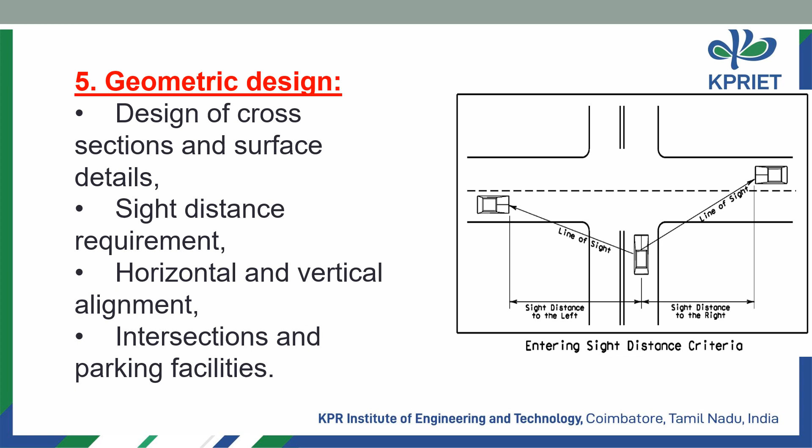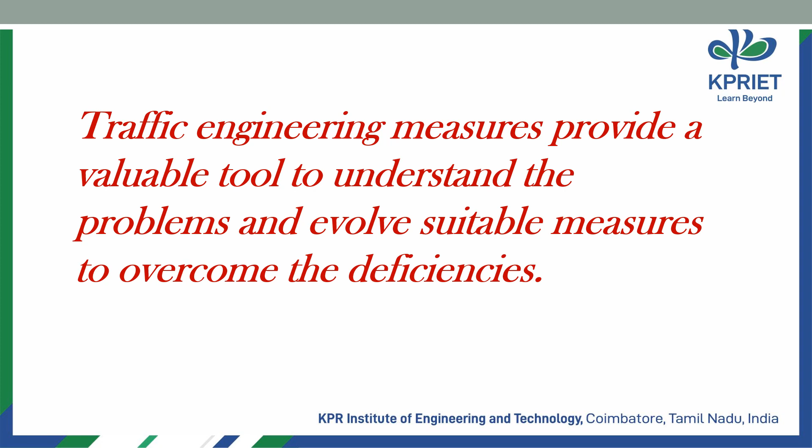Morning. Today we are going to discuss the characteristics of traffic engineering.

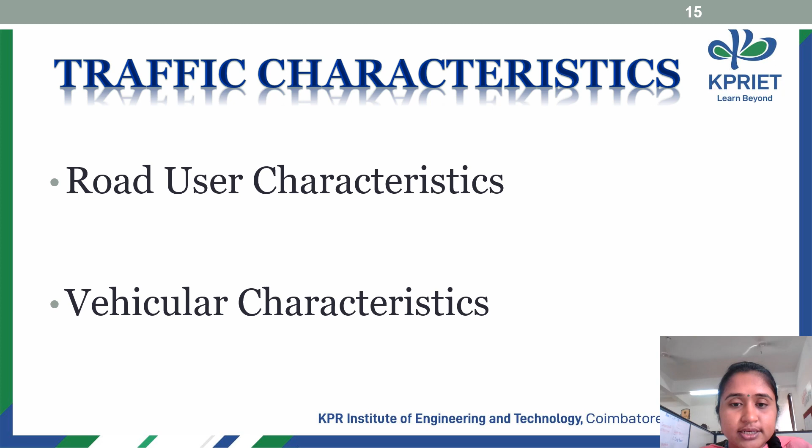Traffic characteristics are generally classified into two categories: road user characteristics and vehicular characteristics. Road user characteristics are based on road users like pedestrians, cyclists and motorists, and are further classified into psychological and physiological characteristics. These two are based on aspects of human behavior on roads, that is, how the human will behave, and based on that behavior these two characteristics are provided.

The first one is physiological characteristic. These are measurable and quantifiable, but psychological characteristics are not quantifiable and are more difficult to measure. The physiological characteristic may include vision and hearing, and the psychological characteristic may include perception, intellection, emotion, and volition.

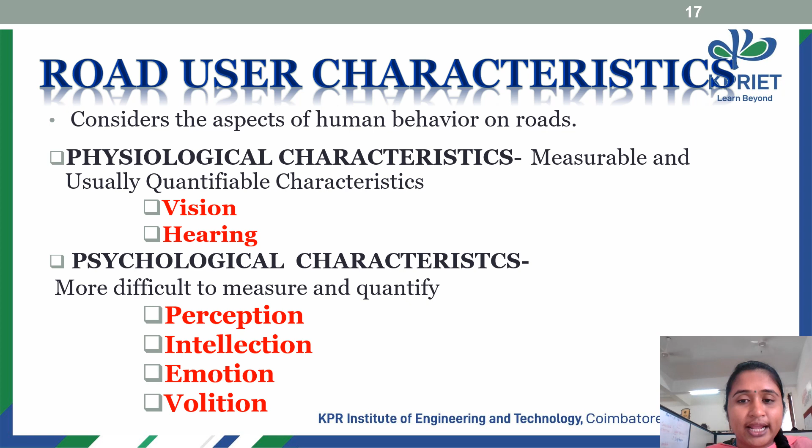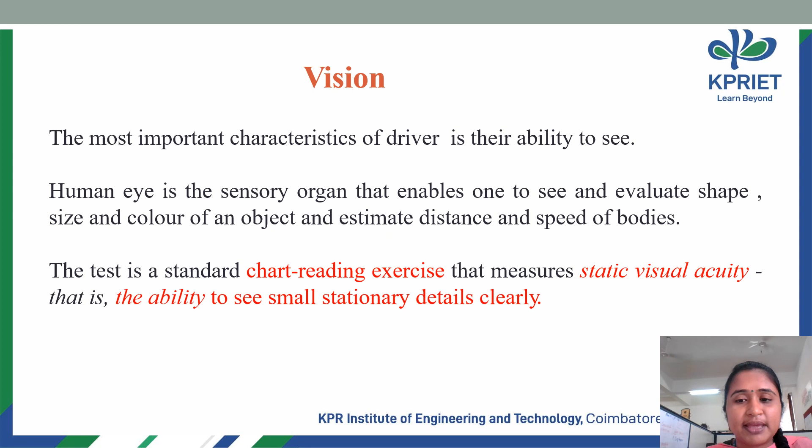Let's see the physiological characteristic first. In that, first we are going to discuss vision. Vision is nothing but the characteristic of the driver which helps in the ability to see the vehicle on the road. We know that the human eye is a sensory organ which enables one to see and evaluate the shape and size of an object on the road. Based on shape, size and distance, we can estimate the distance and speed of the opposing vehicles.

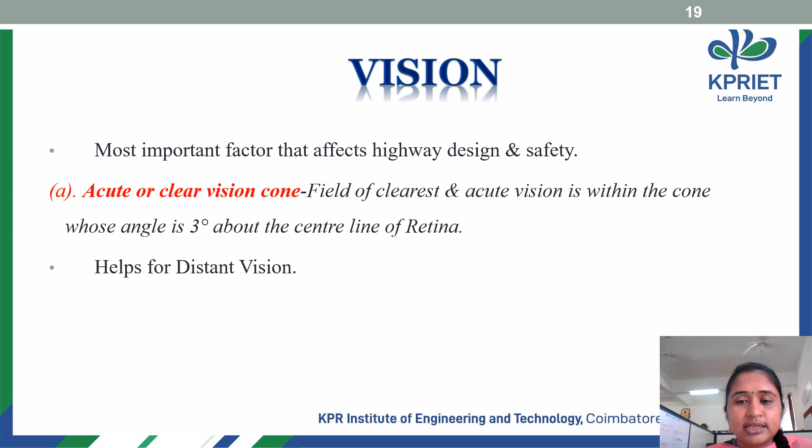Vision is further classified into three cones: the acute vision cone, the fairly clear vision cone, and the peripheral cone. The acute vision cone is a cone in which the vision is completely clear, so it is called the clear vision cone, and the angle of this cone is about 3 to 10 degrees.

The fairly clear vision cone is the second type. In this, the vision is satisfactory when the angle of the cone is about 10 to 12 degrees around the line of sight. This cone is helpful to identify color and shape, and is also important for locating traffic signs and signals.

The third is peripheral vision. This peripheral vision is a little bit not clear, that is, vision is possible in this zone but it is not clear. The angle of peripheral vision is about 160 degrees in the horizontal direction and 115 degrees in the vertical direction.

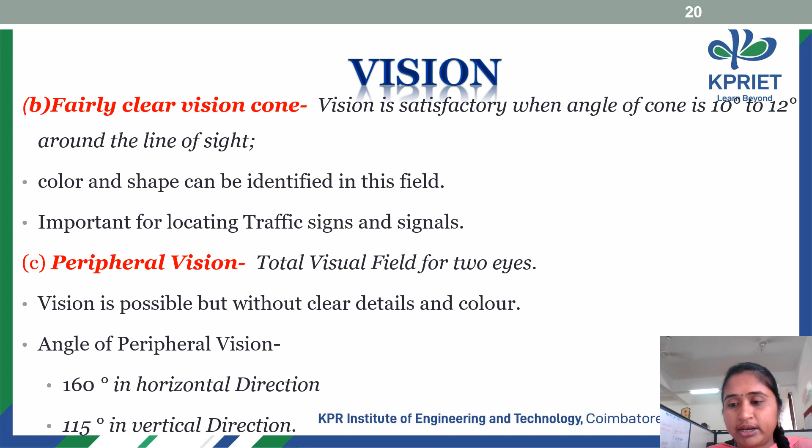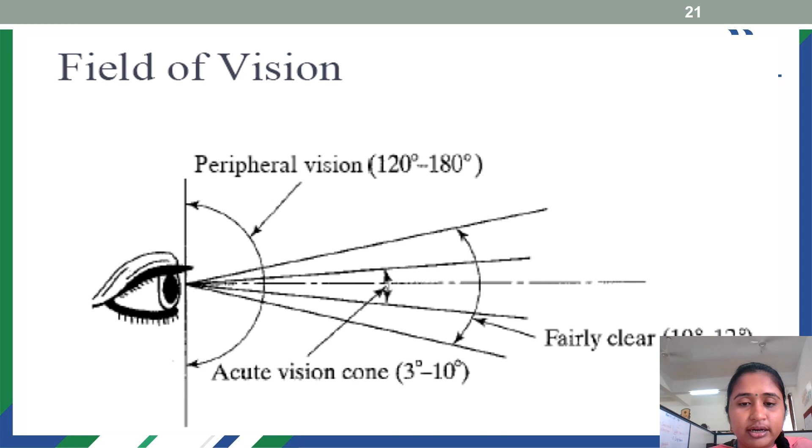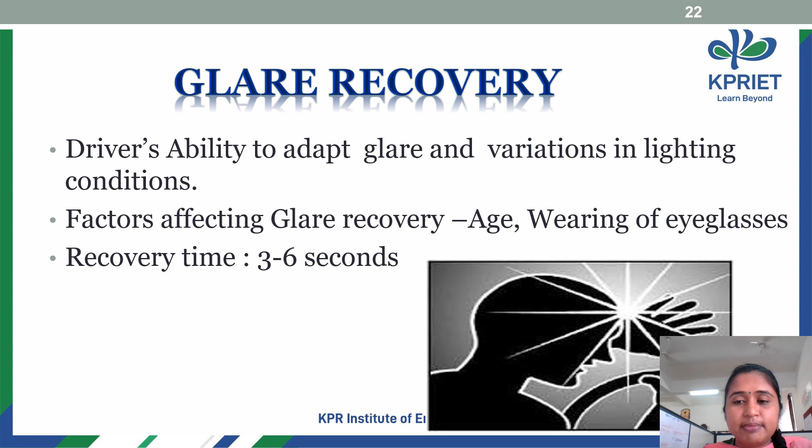The next one is glare recovery. When it comes to vision, recovering from glare is very important. To recover from glare it will take 3 to 6 seconds, and beyond this time, glare recovery can create accidents. So the driver's ability to adapt to glare and varying lighting conditions plays a vital role in physiological characteristics. Some factors affect glare recovery, such as the age of the driver and wearing of eyeglasses; these may affect the recovery of glare and lighting.

And the next one is color vision.

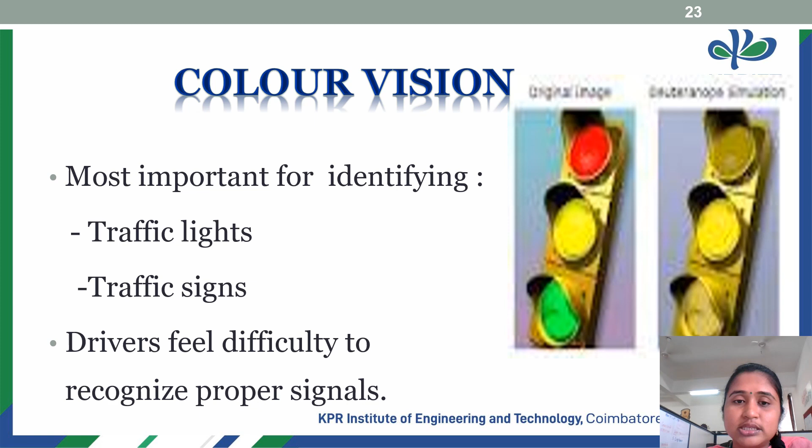You know that color vision is very important when identifying signals and traffic lights, especially during the night time, right? So to recognize the proper signal, color vision is very important. So it is also considered as one of the important factors in the physical characteristics.

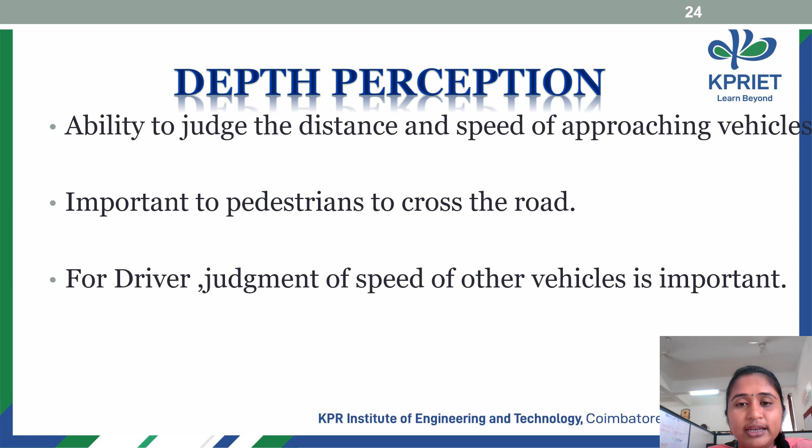And the next important factor is depth perception, that is, perceiving the situation on the road. The ability of the driver to judge the distance and speed of the approaching vehicle is considered as depth perception. Generally this depth perception is very important for both the vehicle driver as well as road users like pedestrians. When we are crossing the road, it is important for the pedestrian to identify the distance and speed of the approaching vehicle. So for that, this depth perception is very important.

And the next factor is hearing. You know that it is very vital for the road user, because based on the sound of the horns, the road user will react to the situation. It alerts the pedestrians as well as the vehicles on the road. Especially elderly people will get alerted by the horn sound, because their eyesight may be a little bit less.

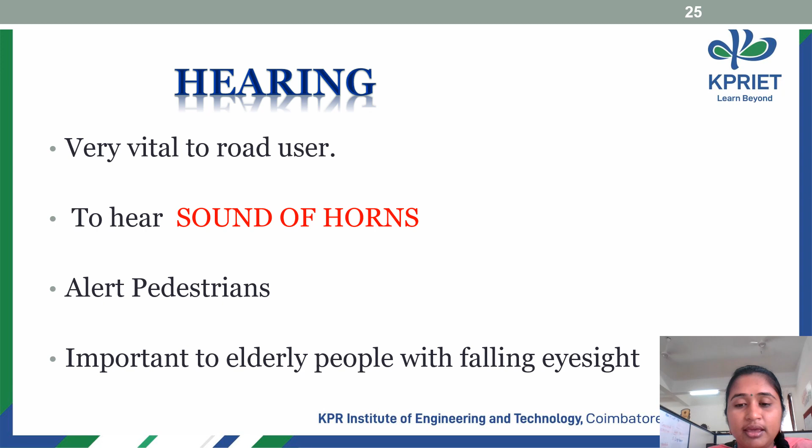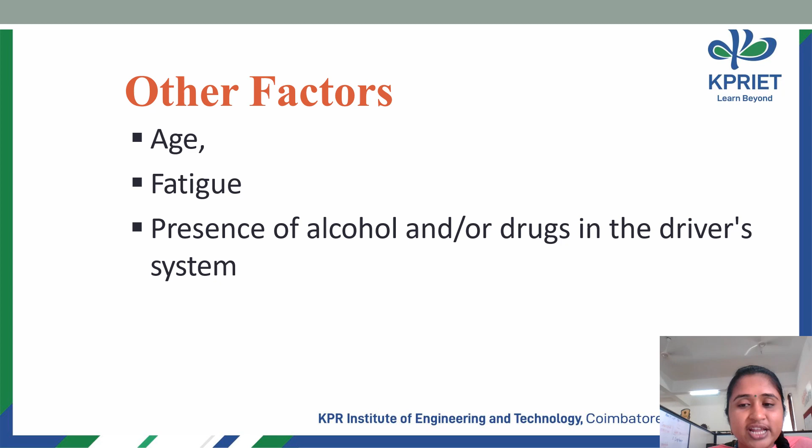Next, in addition to the above factors like vision, hearing, glare recovery, and color vision, some other factors also affect the road user characteristics, like age of the driver, fatigue, and the presence of alcohol or drugs during driving. These may also affect the road user characteristics.

And coming to the psychological characteristics, they are not measurable and not easily quantifiable. It is difficult to do that. So the psychological characteristics will be explained using the PIEV theory, that is perception, intellection, emotion, volition. Perception is the time taken to identify the object, that is, to perceive the object. The driver requires some time, right? So perceiving the situation is called perception.

Then intellection, that is understanding the situation, what is going on on the road, what we have to do. Understanding the exact situation is called intellection. And emotion: after understanding the real situation on the road, the driver has to take some decision based on their emotional condition. So the time taken for taking an emotional decision, right, that is called emotion. That is, the time elapsed during emotional sensation and disturbances is called emotion.

So after analyzing all the things, the real situation, emotional balance and everything, the driver has to take a decision, right, that is considered as volition. So this is called the PIEV theory. That is, the time taken for perception, intellection, emotion, volition is called the PIEV theory. So based on this PIEV theory, we can quantify the psychological characteristics of the road user.

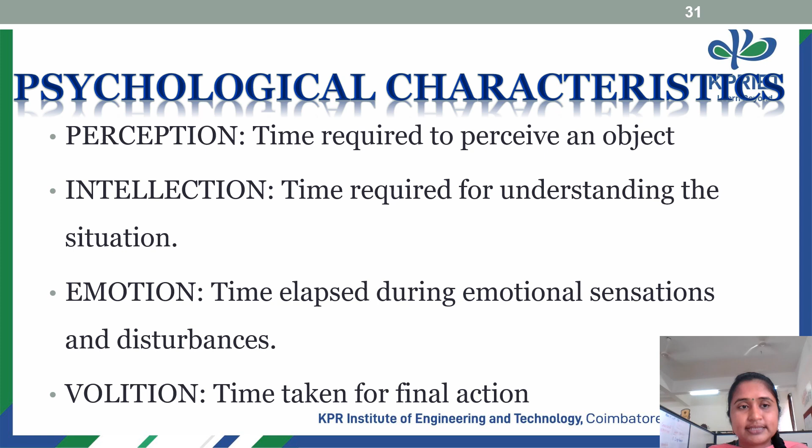Vehicular characteristics. We have some vehicular characteristics, that is, static characteristics and dynamic characteristics. These are the two major characteristics of the vehicle because they affect the design and traffic performance. The static characteristics include dimensions, weight, and maximum turning angle. And the dynamic characteristics include speed, acceleration, braking characteristics, and some aspects of body design. So these characteristics are also considered as traffic characteristics. Based on these, the vehicle will behave when the road user operates the vehicle.